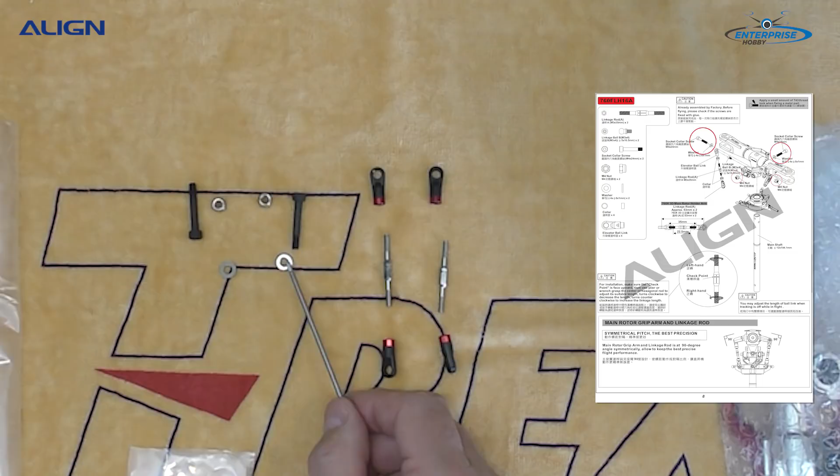We also have the head bolts - two bolts which will hold the actual head onto the main shaft, retaining nuts, and washers used in this case, one for each bolt. These bolts do not need Loctite as you go through the assembly, so be careful of that. The reason is there's a nylon insert that will keep the bolt from backing off. So those are the items inside 700 FLH16A.

Now we have the actual main grip and head block.

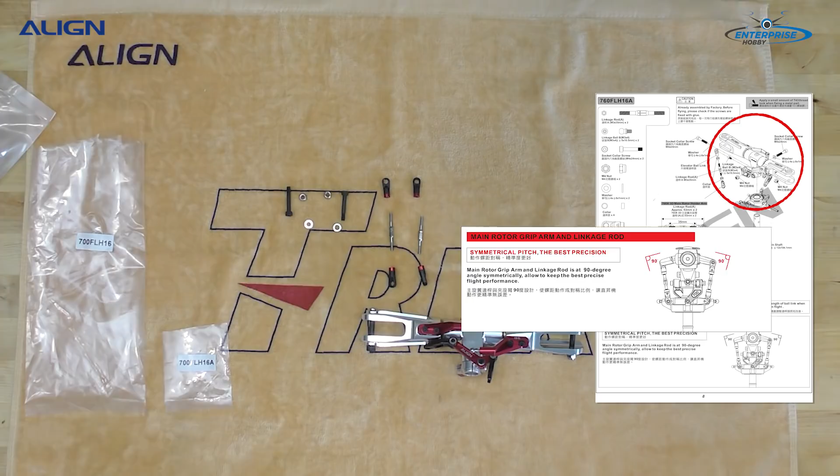The 760 3D main blade grip arms are included with the 700XN kit. The purpose of these new arms is to maintain 90 degrees from zero pitch, either through the positive or negative range, so the arms themselves maintain 90 degrees through the pitch range cycle.

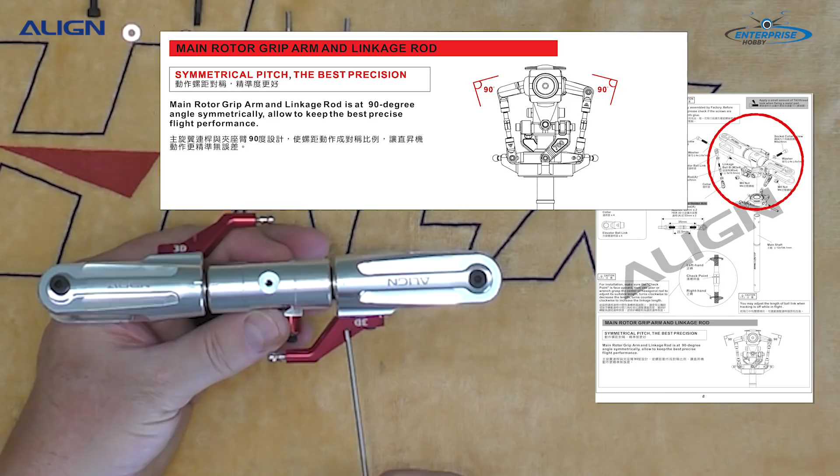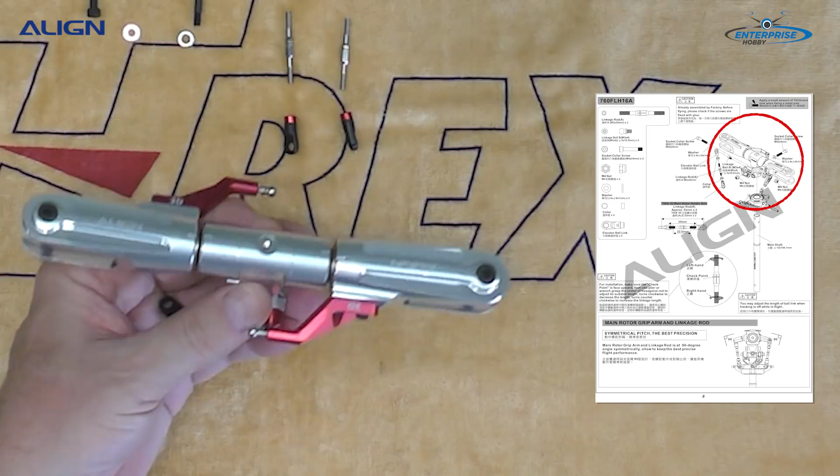To improve performance, all the screws and ball links on the Align helicopter are assembled at the factory only finger tight. They're not forced together and everything is loose. Therefore, when doing the build, you need to remove every single screw, other than a couple places you need to check. We'll discuss that in the build video, but these are never forced on in any way because people just screw them in with their fingers. That way we know everything's in the correct place, and by disassembling it and using a locking compound on the threads, you'll assemble the helicopter properly and it'll stay together for you.

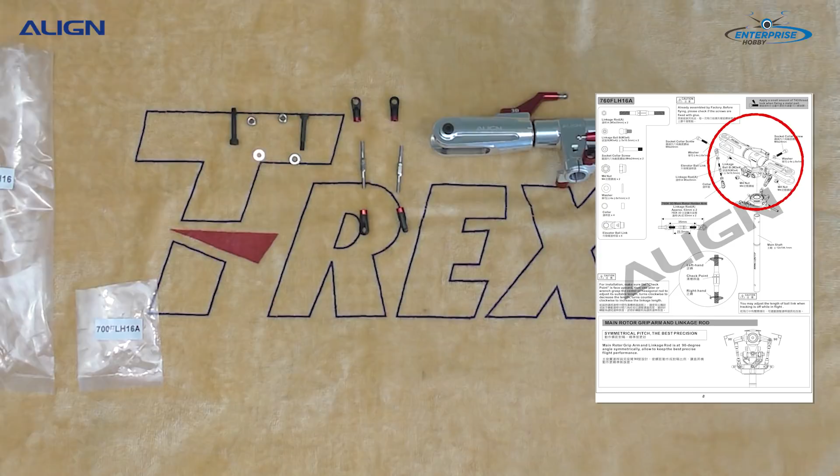So that's the main head, which comes in bag 700 FLH16. Next we'll look at bag number 700 FLH13. This is the swash and main shaft.

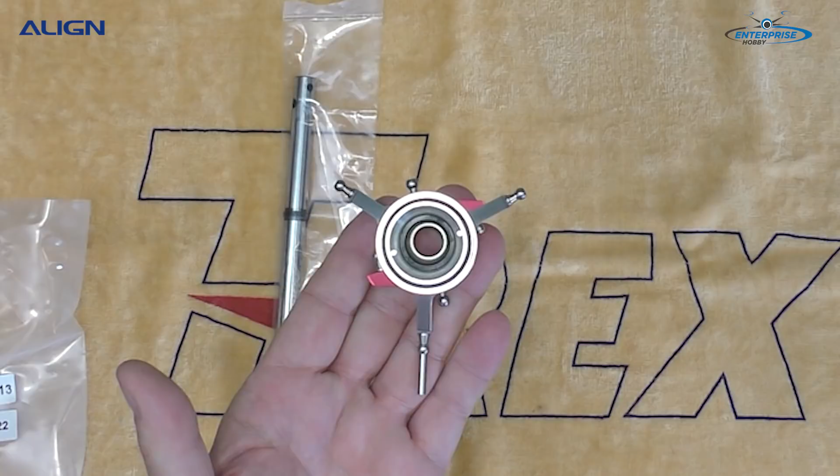So we have the main shaft and 4 spacers. The swash plate, each one of the balls is just finger tight, so you can unscrew them very easily. There's nothing forced together. Also be very cautious that when you take it out of the bag that you look for the different items. We'll go ahead and move this up for the camera. There we have the swash, and we'll go ahead and let you look at the back side. That's the swash and main shaft.

Next, let's go ahead and take a look at parts bag number 700 NB20, the front electronics holder. And parts bag 700 NB20A.

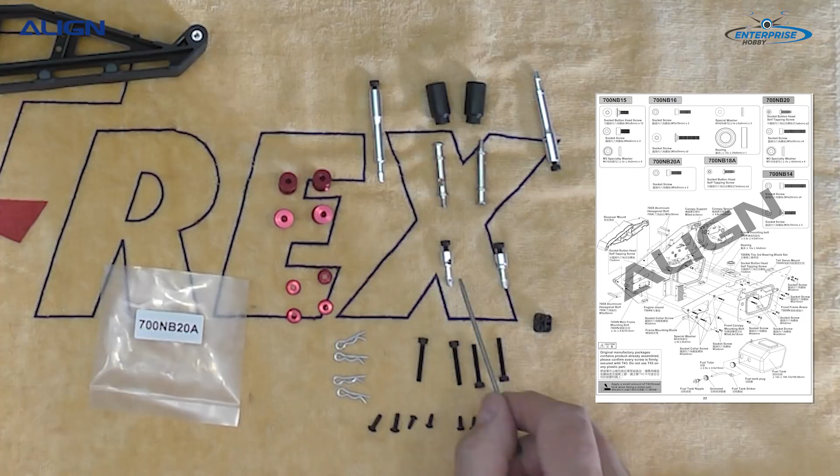These parts came out of bag 700 NB20A. You have the 4 canopy mounting posts and standoffs. So you have the canopy mounting post, the longer ones that go in towards the rear of the helicopter, and then the front shorter ones which are near the front, and then the standoffs, which have a rubber piece that fits right on them, and that keeps the canopy away from the actual frame itself.

We also have the mount that is used for the sensor, the magnet sensor that's going to attach to the clutch bell or just sit above the clutch bell. This is the piece that is going to allow the screws to tighten the actual sensor to the frame itself, with a couple mounting screws, and then the smaller screws are for different places in the helicopter where plastic is used because they're self-tapping threads.

We have the 4 canopy mounts, 4 little metal grommet washers for style, and then also the 4 posts, because it is a 2-frame construction. Those are the standoffs for the secondary outer frame.

And then we have the actual electronics mounting block where you can tuck your electronics. There's a nice place here, large enough for the Beast Plus or any other of the gyros, which are similar in size, which is pretty much everything on the market now that's new. Then you can incorporate in the side pockets some of your other electronic items. And as you can see, there's plenty of space for the wiring to be able to come through in these different directions or slots.

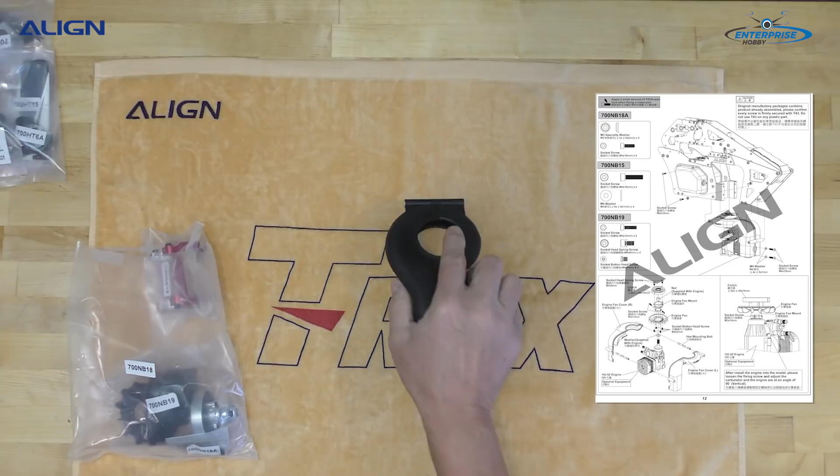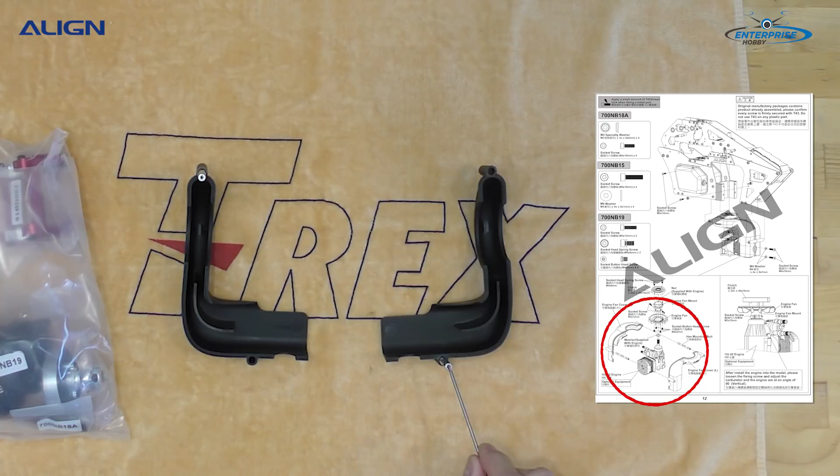Okay, we're going to open up bag number 700 NB18, and as you can see, it includes the engine fan cover. It's a 2-piece module, pretty standard in the lines. You have the retaining bolts that hold everything together. The screws go through the frame and into this piece here to keep it in the frame. And the fan itself is going to sit in this location to generate airflow.

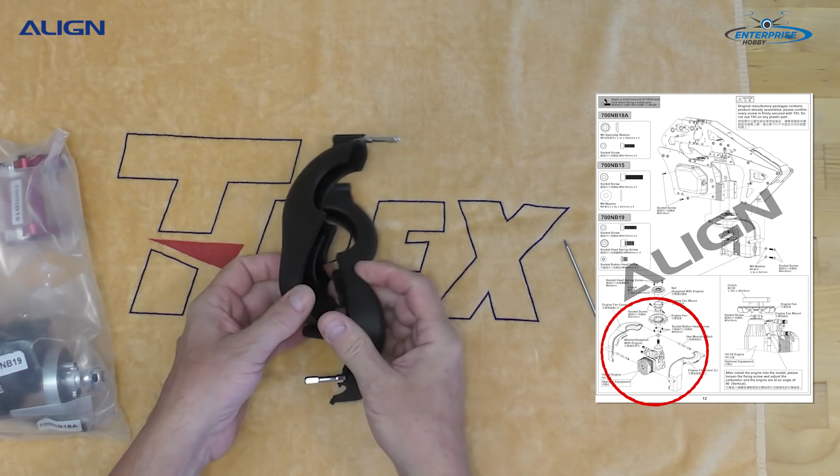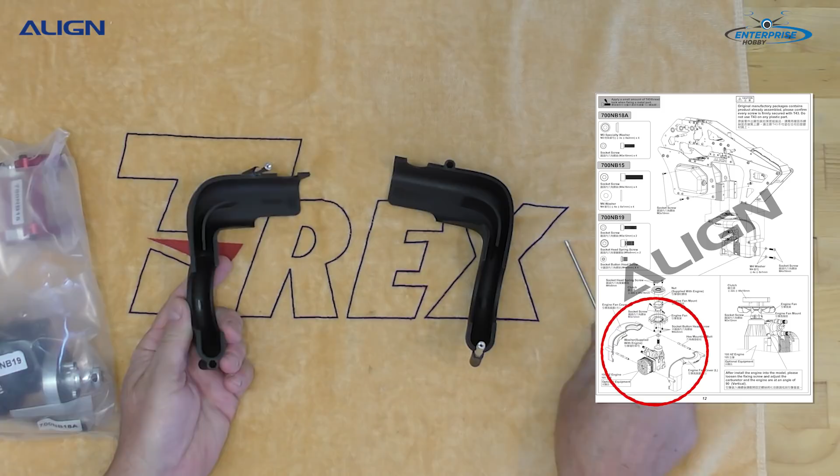Basically, it sits this way in the helicopter. The face of the helicopter is towards the top of the screen, and the fan itself generates airflow and pushes it down over the front onto the actual nitro motor. We've got that piece.

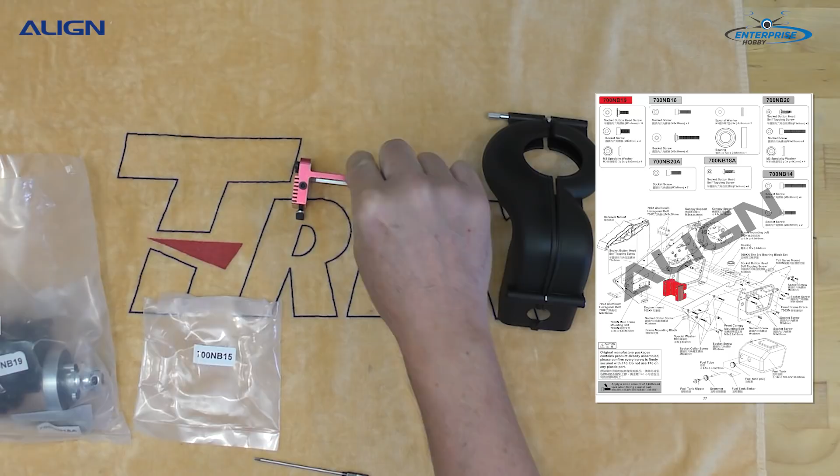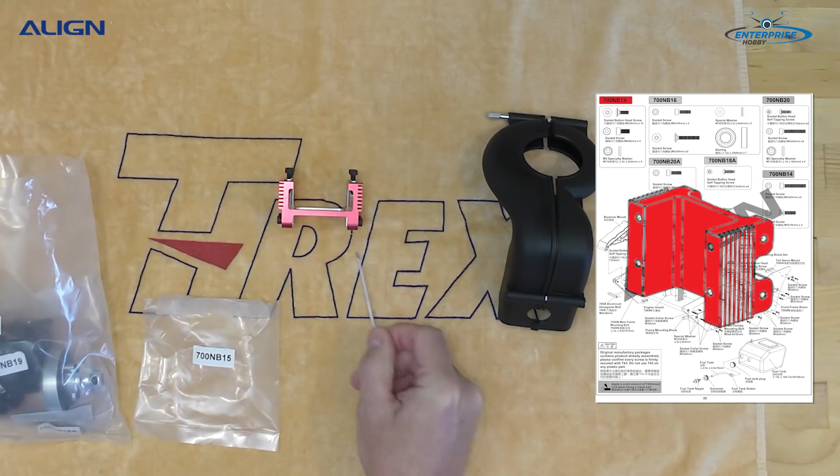And then we have the part which is in 700 NB15, which is the motor mount. Bottom of the motor mount is here because that's the bottom plate it's going to mount on. It connects to the frame again in this direction. The motor is going to mount on the front here. This is for the side bolt. This is a heat dissipation, that's why it's all one piece. A little more sturdy, and also gives you frame support.

We have bag 700 NB18A. And in bag 700 NB18A, you have different screws that are going to attach the frame and the other parts. Some of the other parts, self-tapping screws, and also the retaining washer collars, spacers that go on the outside of the frame before they open up bag number 700 NB19.

And this is what everybody's been looking at or curious about.

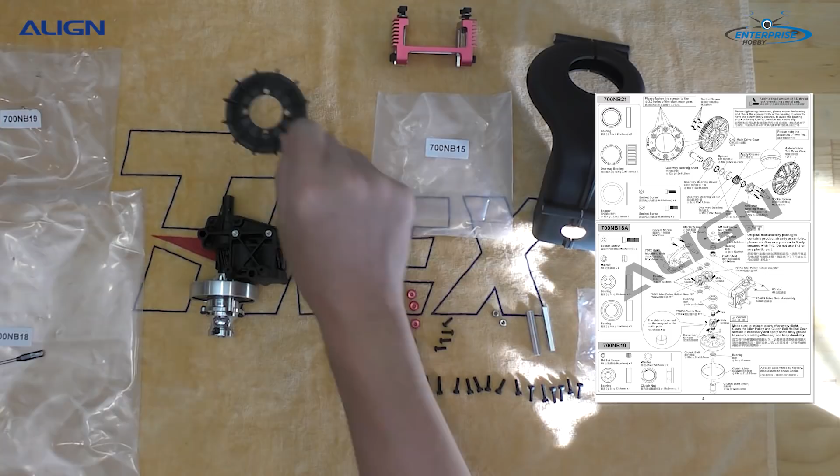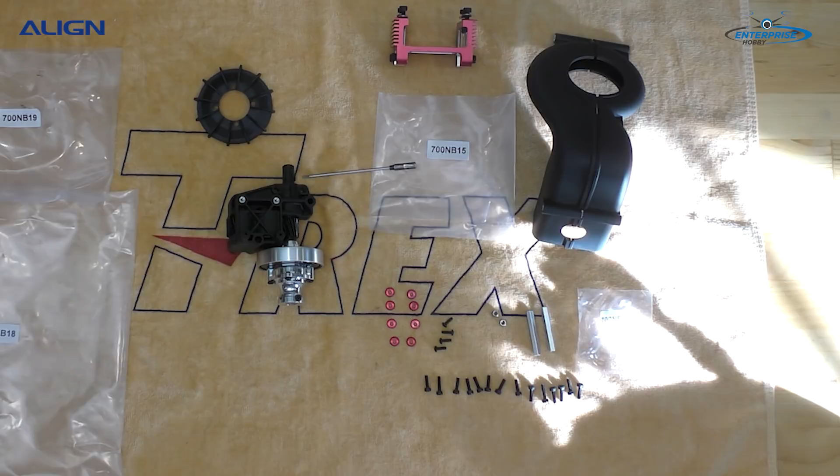All right, so we have the fan. We have the 700XN drive gear assembly. These already have a little bit of grease on them. I will open this 700XN drive gear assembly in just a little bit. You will not hear any noise during flight, but Align's done a couple changes, and I will show you those changes. So go ahead and take off the little cap here.

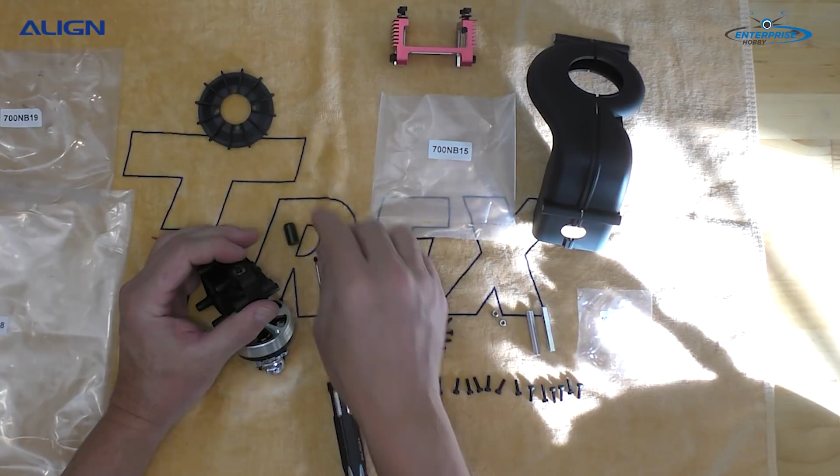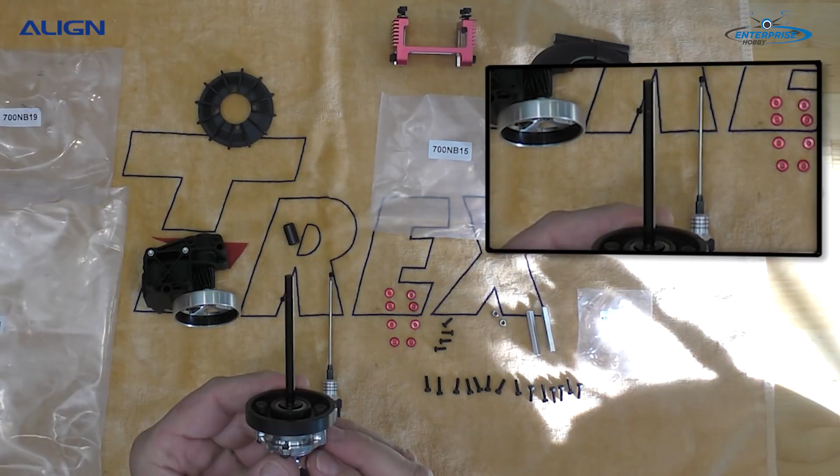This will allow me to remove the shaft. The set screw is going to set in this little carve-out right here, and I'll hold it up there and hopefully I can hold it still enough. The carve-out itself is flat, no longer concaved, and that should aid the retaining nut or set screw, once it's screwed in, to rest against a flatter surface and bite a little better, so it won't allow this piece to move or slip as it has in the past.

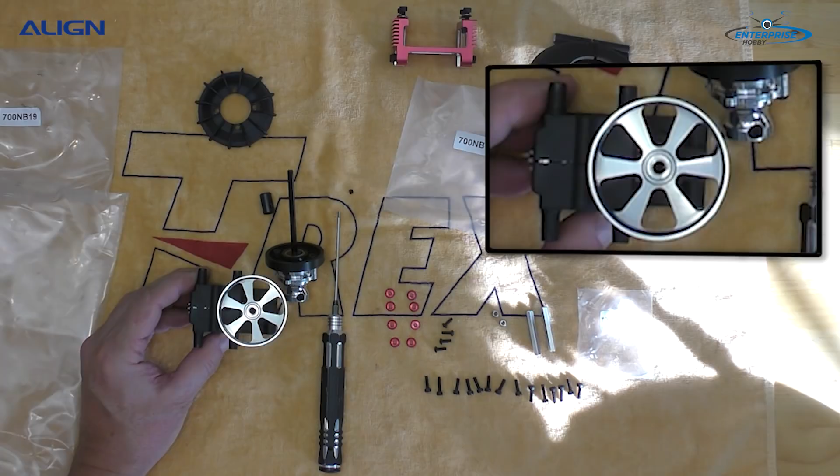So Align made that change. The other item is the clutch, and now we have the new clutch bell. The clutch bell is a steel liner, solid one piece. It's performed very well, doesn't really change anything, doesn't get hot, and there's not a lot of slippage. We've tested all that, so it's a very nice feature.

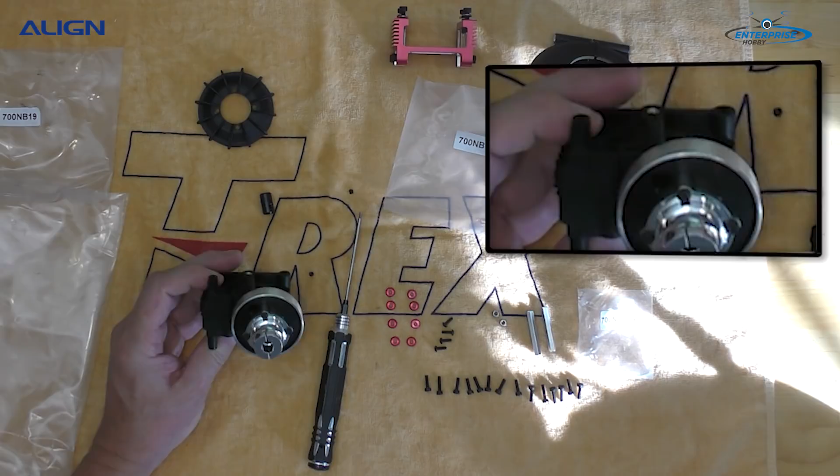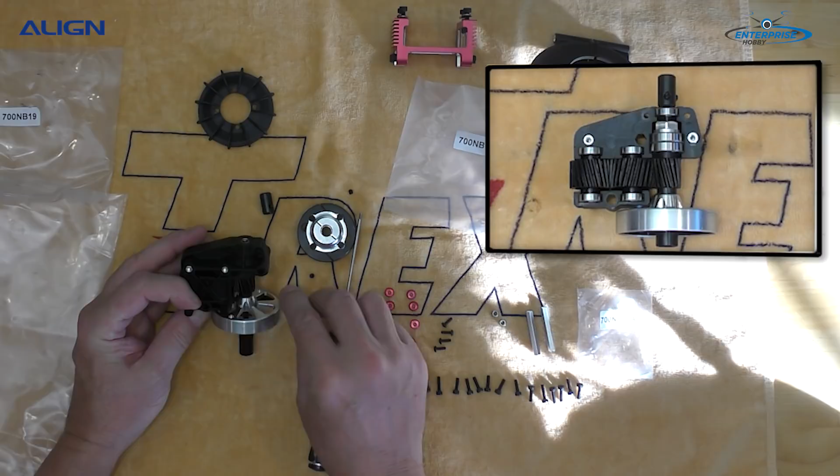It was one of the things several of you out there approached and asked for, a better tolerance, less play between the clutch, so there's no slippage, and you can see everything goes together fairly well and the spacing is nice. These gears, there's three of them, and as the picture to the right shows, there's spacers.

The gears themselves aren't going to make or provide any additional noise - you really can't hear them. So Align felt it was a good idea, and we did too, to put in a gear transmission because it was a more efficient way of moving energy than a belt, which has a little bit of drag. A nitro performs better with the gear transmission than with a belt transmission, because the belt removes a little bit of the power of the motor, but not a lot. So we just felt the gear transmission would work better.

So this is the big hot topic everybody's talking about. It performs great, is a very efficient way to move the motor forward and allow the helicopter to balance. On the previous Align helicopter, the reason the servos were so far forward using push-pull rods was so that the helicopter would balance on the main shaft and perform better in the air.

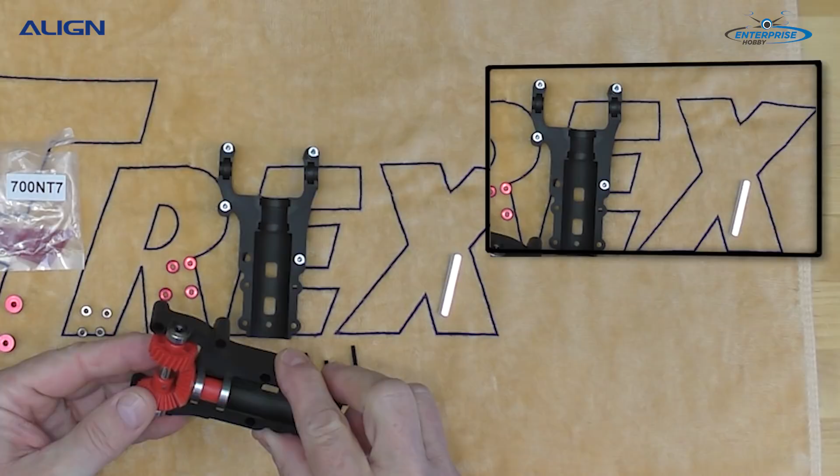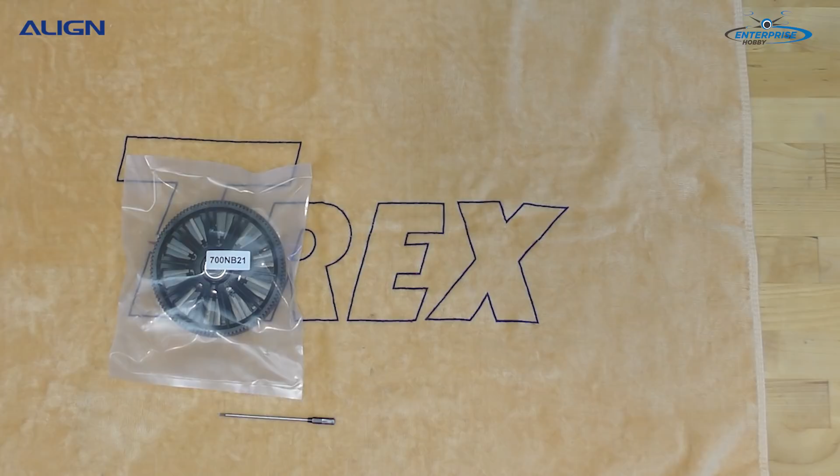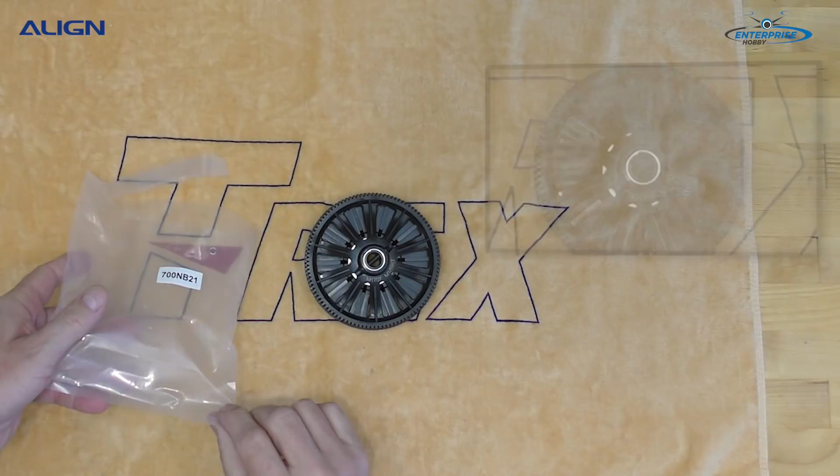And this is a 22 tooth gear. We're going to go ahead and take a look at the 700 NB21 - these are the main gears. You've got to be careful when you open up the bag so you don't lose any of the parts. This was loose.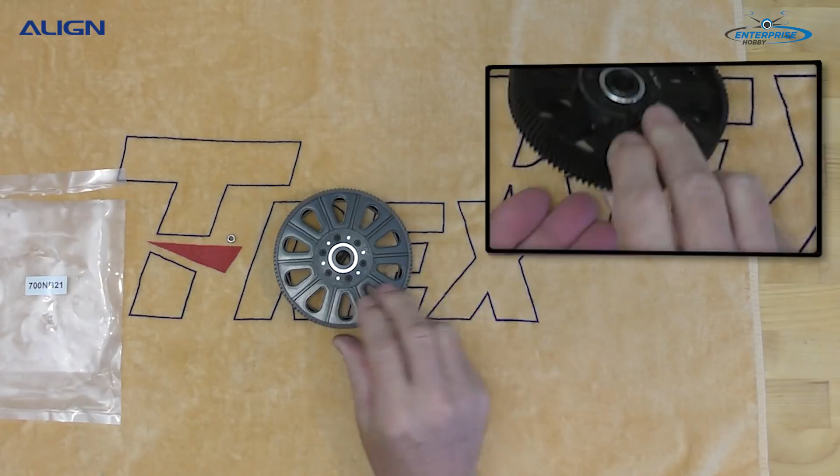The anti-rotation gear is 104 tooth - you might be able to see it. And the main gear itself is 107 tooth. Bag number 700 MB16.

Just going to dump everything out - you need to be careful of it. You have the anti-rotation bracket, which has the new Delrin insert, another set of spacers for the frame, cross supports, carbon fiber mounting bracket for the tail servo, bearing block, main shaft, third bearing block.

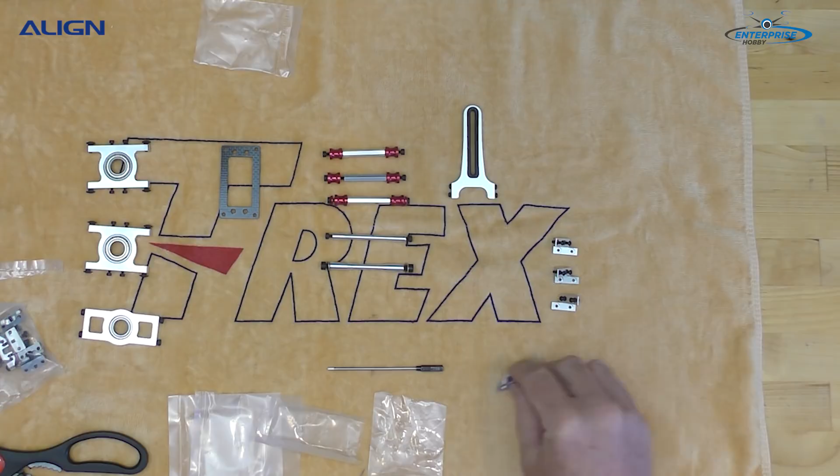Four mounting brackets, one for the aileron and one for the pitch servo, or the left and right servo.

And then the last bag are all the bottom plate mounting pieces. So you have - I'm going to put them right there - for the bottom half of the frame, which attaches and holds everything together. You end up with two in the rear, middle, two rear, two middle, two front. And I could be in the wrong order, I haven't looked at the manual, I just laid them out that way.

The last bag is bag 700 NT8. Go ahead and I'll cut this open for you.

In bag number 700 HT15, we have the Align tail blades. These are the 106s, and as you can see, they come in a separate little pack as far as outside wrapping.

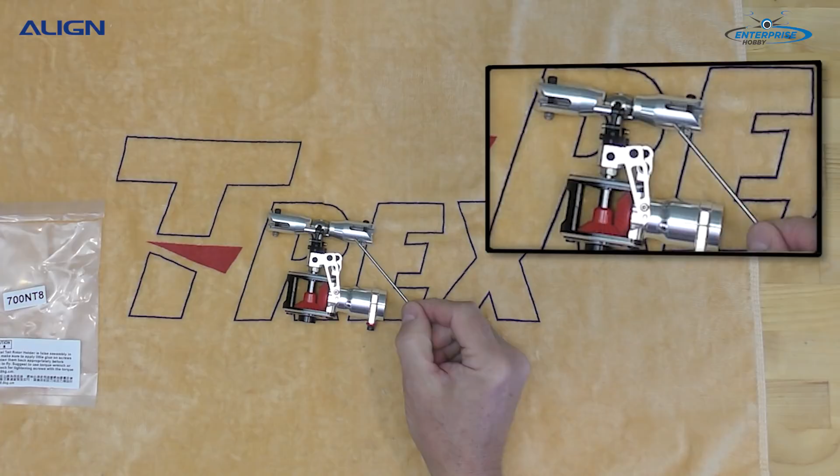Let's go ahead and open up 700 NT8. This is the whole entire tail assembly housing. Let's zoom in and take a look, flip it over. This new tail assembly has larger tail blade grips, uses a larger screw to hold in the thrust bearings, and has the replaceable arm. There's the whole tail - I'm going to move that back and forth. That concludes all the items inside the main rotor head set, box number 173026022. Go ahead and put all these items back in.

Let's move to the electronics device box. Since this is a combo kit, you've purchased it with the Align servos and a couple other items, so we have two bags - actually three. Everything's bubble wrapped, so go ahead and open up the wrap box first.

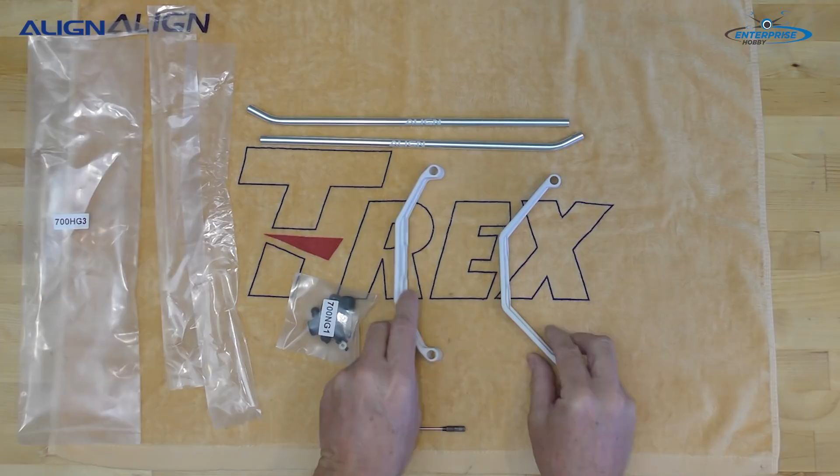You have 2 skid pipes. Put one this way. Mark the line. You have the 2 different front landing skid, it's the shorter one. The rear landing skid is the higher one. That way your helicopter sits at a 5-degree tilt, keeps the tail out of the ground. Some people like that, some people don't. You can always change them.

Inside of bag number 700 NG1, which I'm opening right now, you have 4 rubber pieces, 4 end caps. Almost lost it. 4 washers and 4 tiny set screws.

The end caps go onto the end of the skid tubes. The little set screws are used to hold the tubes in place through the little hole here. These can be used on the skid tube so that the helicopter doesn't slide left or right. If you're going to be doing auto rotation, it's not a good idea to use. However, some people do use them because it does keep the wear off of the actual plastic pieces and the skid tubes themselves.

Next we have this bag, and it's bubble wrapped. As you can see, it's the frame pieces. Go ahead and cut it open.